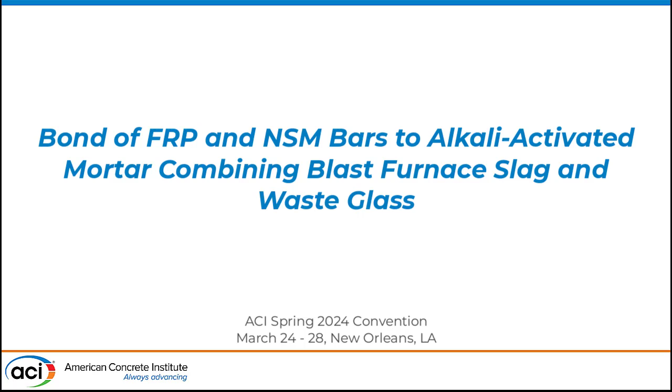My name is Ivana Krajnovic, and I'm a PhD researcher of the Marie project, doing research in alkali-activated materials used for strengthening and repair at the Magnel-Vandepitte laboratory. Today I will share findings from my internship at the Corning research facility in Chambéry, France, where I worked on the bond between FRPs and alkali-activated materials.

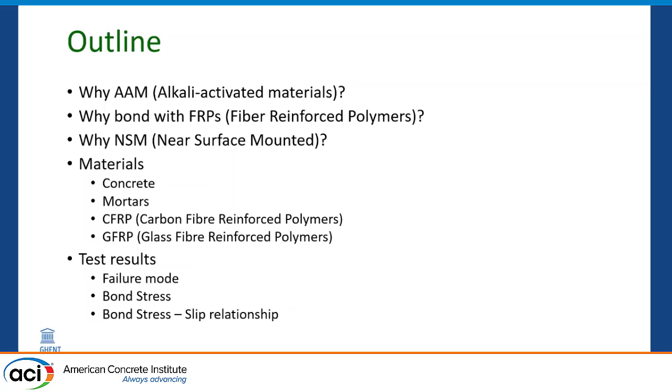First I will talk a little bit about alkali-activated materials, then about the inspiration for the bond test with fiber-reinforced polymer and near surface mounted applications. Then I will shortly introduce materials and test results.

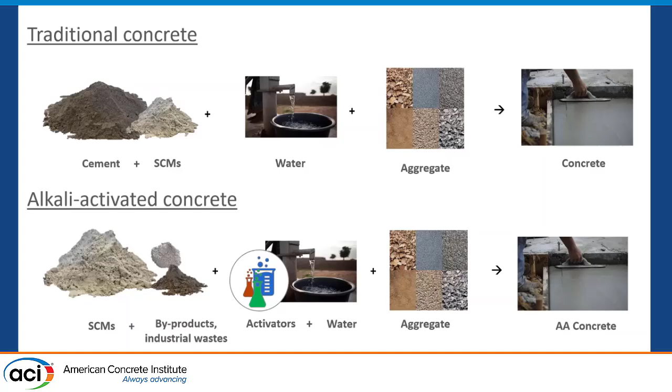Here we have traditional concrete, normally made with cement and supplementary cementitious materials, blended with water and aggregates to produce concrete. And we have alkali-activated concrete, made mainly with supplementary cementitious materials, blended with industrial byproducts and waste, activated with alkaline solutions, and blended with aggregate to create alkali-activated concrete.

Why do we do this? Because by omitting cement, we decrease the carbon footprint of the concrete, and by using byproducts and waste, we decrease the consumption of raw materials. And when we use locally available byproducts, we can reduce transportation costs.

So we do this to get equivalent or better concrete performance than PC concrete, and we also use this to invoke curiosity of the public, mainly due to the usage of waste in concrete. This concrete fits into the circular economy.

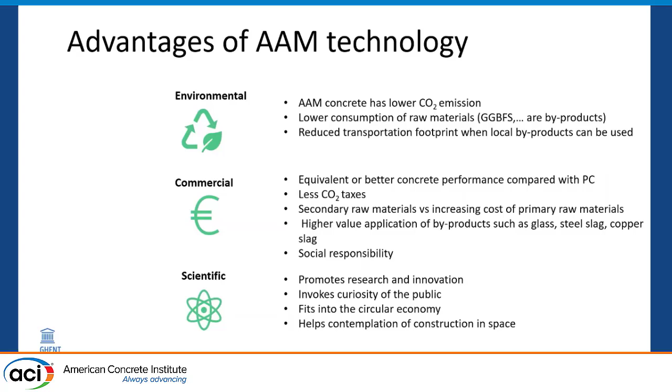It also helps contemplation of construction. So for my current mix design, for the supplementary cementitious material I used blast furnace slag, which is locally available in Ghent.

We used glass waste powder from glass fiber production from Owens Corning company. We activated it with a mixture of sodium silicate and potassium hydroxide, and with sand, to create a two-component system, alkali-activated mortar. This mix design is presented in detail in our recent publication.

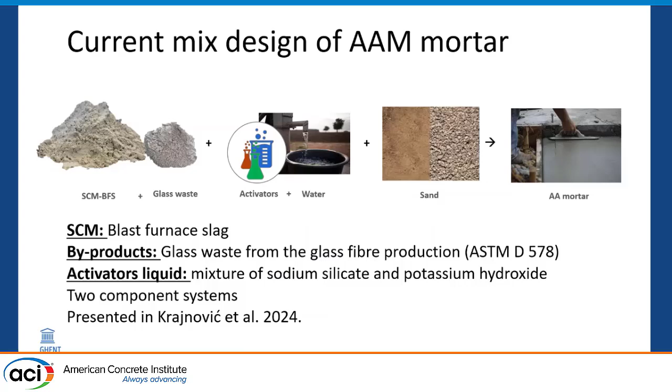Here you can see that compressive strength development between PC mortar and alkali-activated mortar follow similar trends. The same can be said for flexural strength at 1, 7 and 28 days.

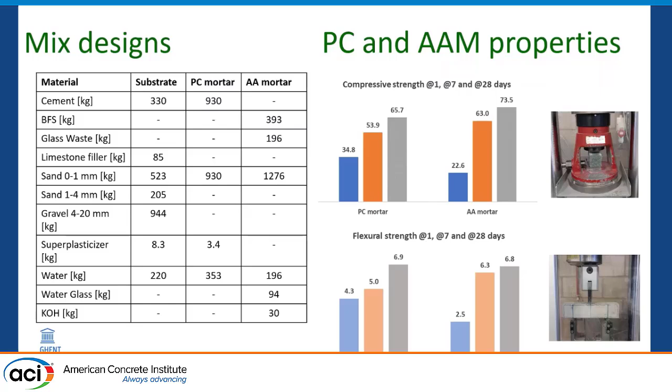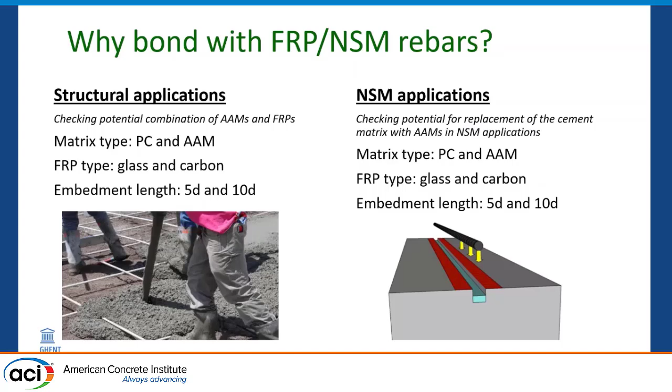There we also used two matrix types, two fiber types, and two embedment lengths. We had CFRP bars of diameter 6, epoxy impregnated with helical wrapping, and for GFRP we had epoxy impregnated sand coated rebars.

Mechanical characteristics - I'm sorry, I gave them in international units.

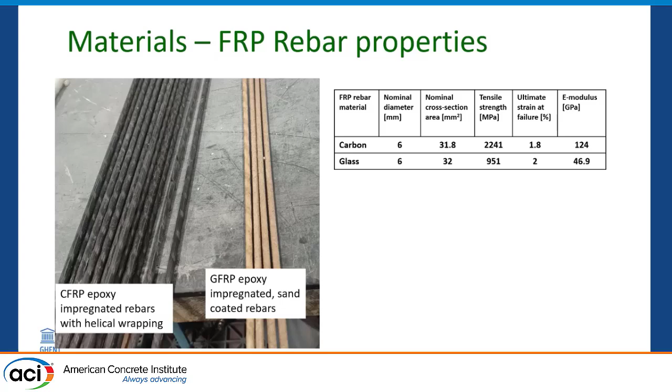Here you can see the specimen preparation. For pull-out specimens, we used polystyrene molds with bond breaker and embedment lengths of 5 and 10D. For near surface mounted specimens, we also used 150 millimeter cubic molds made of polystyrene and wooden inserts for creating the groove.

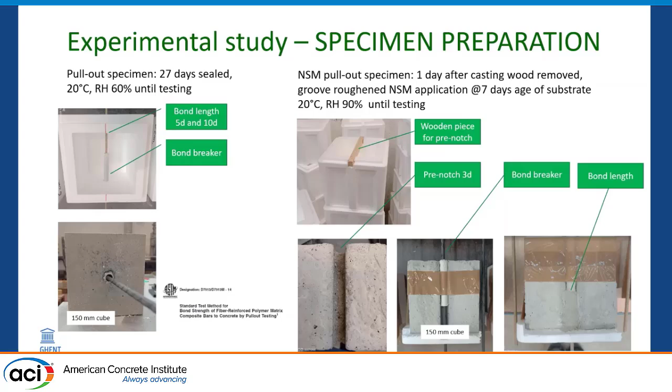After 1 day with mortar specimens, we roughened the surface of the groove with a steel brush, and 7 days after casting, we applied alkali-activated and Portland cement mortars together with the rebars. We waited 28 days from mortar application to test the specimen.

So here you can see the test setup: there is the clamp, then the loading frame, and the LVDT on the unloaded end of the rebar. The same setup is used for near surface mounting.

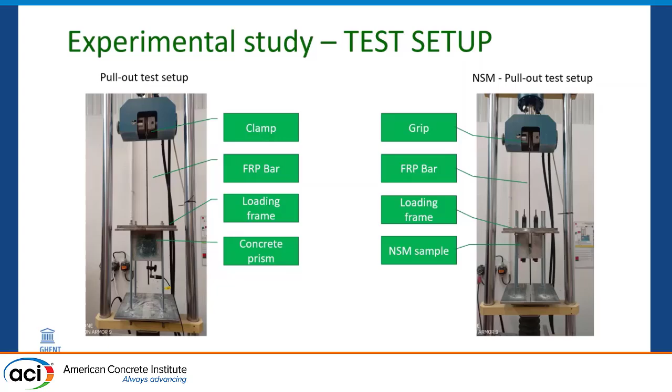We did in total 70 tests with 2 FRP materials, 2 binding materials, and 2 bond lengths: 40 pull-out tests and 30 near surface mounted tests. In pull-out tests, we tested GFRP with 6 millimeter diameter, embedment length of 5D for both OPC and AAMs, and the same for 10D. In near surface mount, we omitted 5D for Portland cement and only tested 10D.

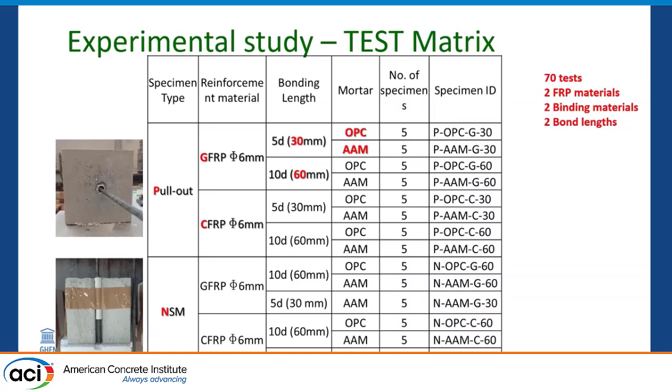Let's talk about failure mode. For the GFRP, there was abrupt failure with peel-off of the sand coating with alkali-activated materials, and pull-out without visible damage to the bar for Portland cement.

For CFRP, we similarly observed peel-off of the outer epoxy layer with breaking of the outer fibers, which also created a sort of anchorage at the unloaded end of the rebar, or pull-out of the rebar for the Portland cement specimen.

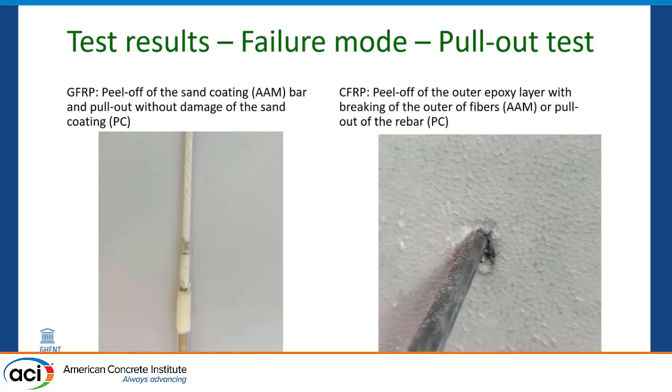Here we can see the average bond stress at maximum load. We see that the alkali-activated material outperforms Portland cement by more than 30 or 50%. And when changed from 5D to 10D, in Portland cement mixtures the average bond stress actually increased marginally, while in the alkali-activated mortar it decreases.

When it comes to the CFRP, we also see an increase in bond stress when changed from 5D to 10D, but no increase when changed from 5D to 10D for the alkali-activated material.

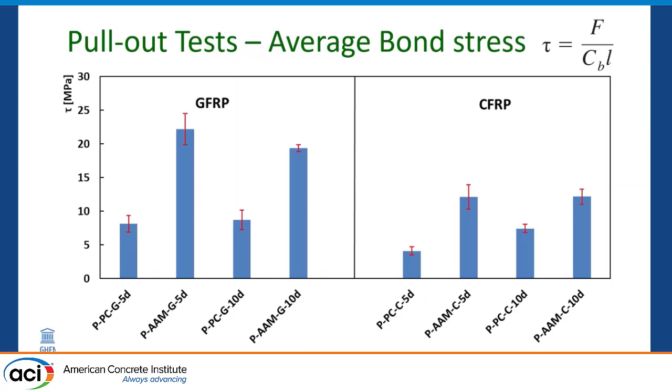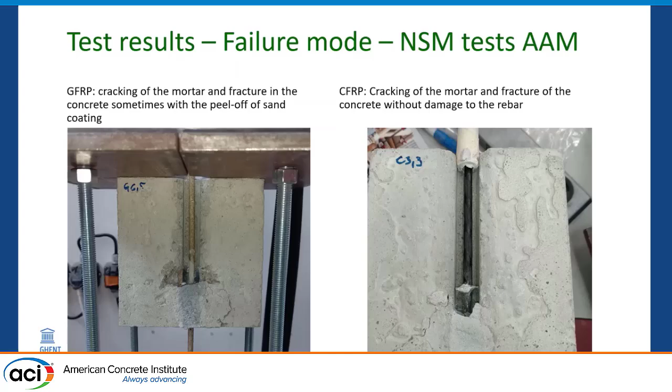Now I will jump to the failure mode of the NSM, near-surface-mounted, specimens. We can see that the failure mode is cracking of the mortar with fracture of the concrete, and sometimes peel-off of the sand coating for GFRP with alkali-activated mortar, along with cracking of the mortar and fracture of the concrete without damage to the rebar for CFRP.

There is a different failure mode observed in the Portland cement matrix, where for GFRP there was a mortar-concrete interface failure on both sides, and also a mortar-concrete interface failure with horizontal cracks in one case.

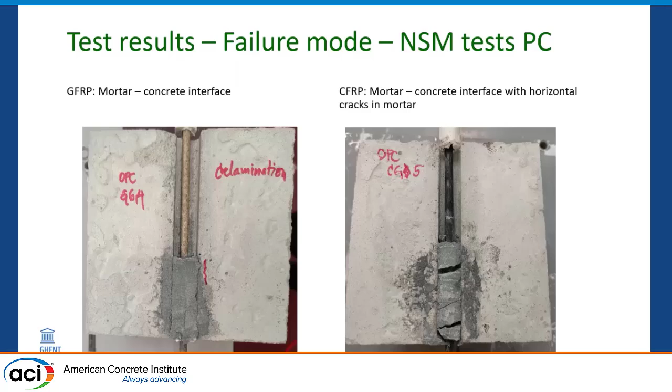Contrary to what is found for pull-out tests, here from 5D to 10D, the average bond stress at maximum load increases by about 50% for both alkali-activated materials and Portland cement, where we see that Portland cement with 10D develops less stress than AAM.

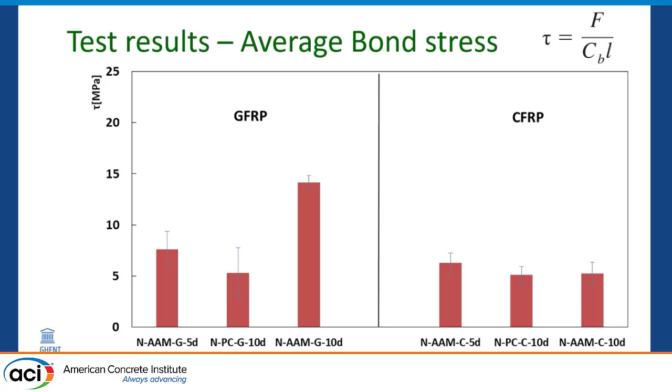When it comes to carbon fiber, there is not a lot of fluctuation. The Portland cement 10D and the alkali-activated 10D are similar, and alkali-activated with 5D develops slightly higher bond stress.

Here we can see the curve from ACI 440.1R, with different C values for different bar positions, and we see that all of our results are above the curve.

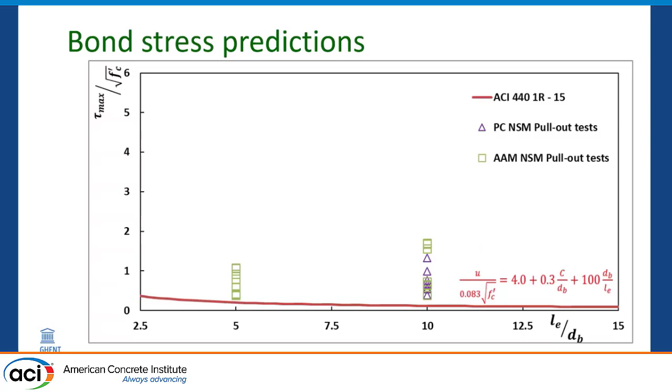Here we can see the bond stress versus slip behavior, this time only for GFRP with 10D and GFRP with PC for 10D. We see that the behavior is similar to the pull-out tests, and we don't have the 5D bond stress curve because our specimen was destroyed.

For carbon fiber, we see the increase in bond stress at small levels of slip, then reaching the maximum, decreasing to a certain point, and then continuing steadily for both alkali-activated materials and Portland cement materials.

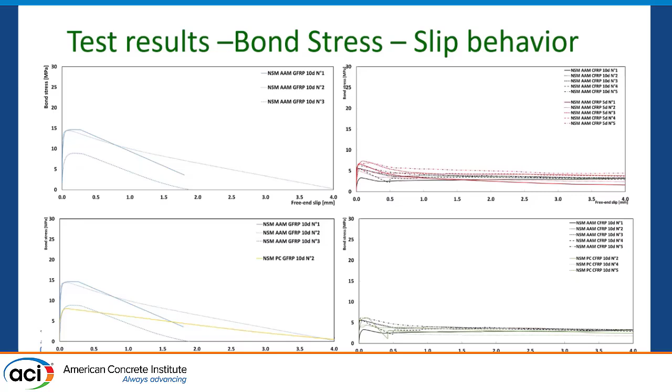So here again, the bond stress-slip prediction behavior was best with the Xing 2015 model, and for carbon fibers with both alkali-activated materials and Portland cement, we had the best correlation with the modified BPE model proposed by Consenza in 1997.

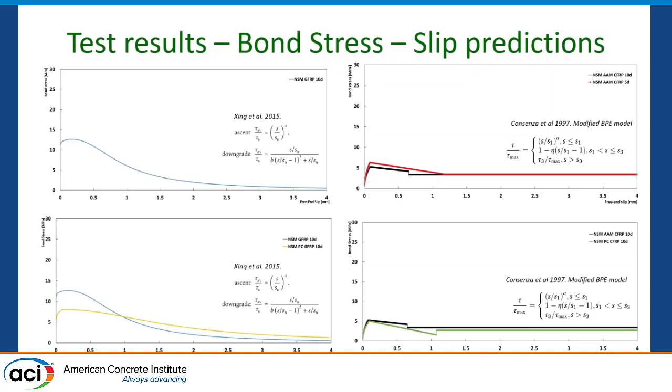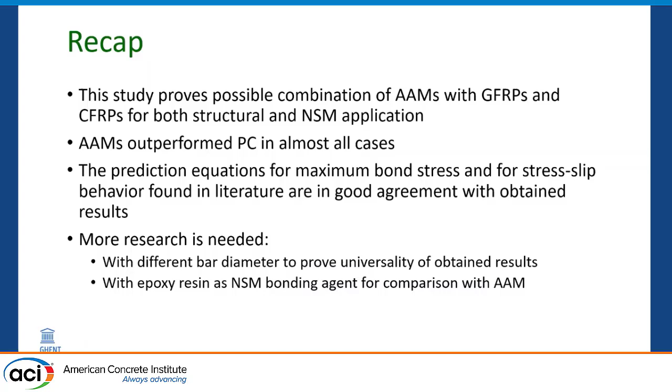In the recap, this study proves a possible combination of alkali-activated mortars and FRPs for both structural and NSM surface-mounted applications. The AAMs outperformed Portland cement in almost all cases. The prediction equations for maximum bond stress and for stress-slip behavior found in literature are in good agreement with the obtained results, and more research is needed with different bar diameters and with epoxy resin as an NSM bonding agent for comparison with AAM.